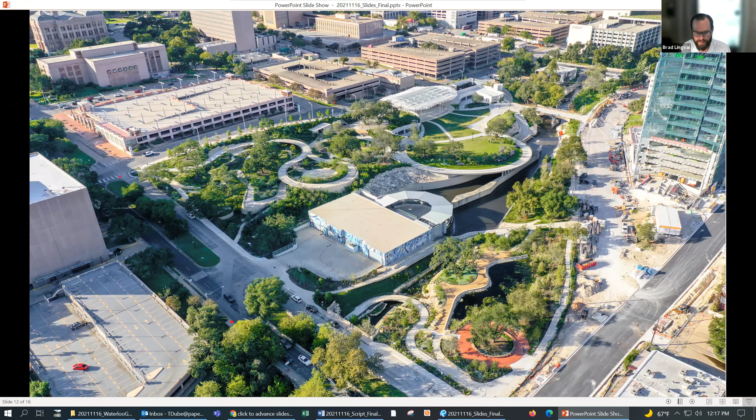The site itself was developed through 3 different site development permits, including the tunnel, which was not directly impacted by the site design of the park. The park was designed around the resultant tunnel construction, but there was a lot of coordination between the tunnel engineering team and the park designers. And then there were 2 site development permits that were directly affected by the park. One being the structural site development permit for the lawn support that extends out over the creek.

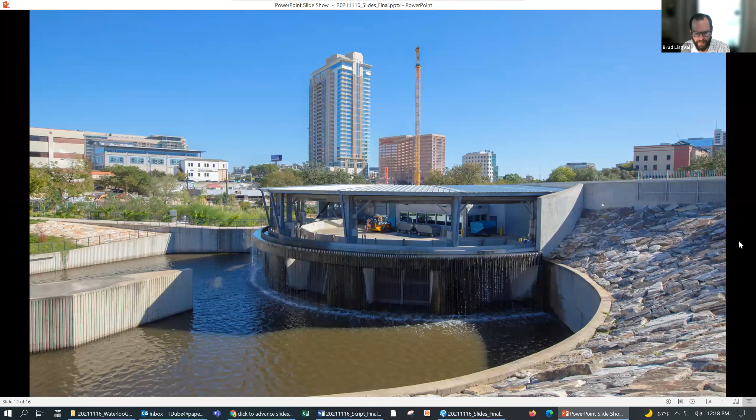Next slide. And then the second being the actual park site development permit, where the music venue, walkways, playground, trails, water quality facilities were all designed and permitted. The tunnel intake facility that we're looking at here is the primary inlet facility for the tunnel. It's actually one of 3 that are located along Waller Creek. But this is the first one, and that facility frees up about 20 acres of downtown property.

As I mentioned, the lawn, if you go to the next slide, Tyler, extends over the creek and provides additional area, not just for the park, but also for the venue and the seating for anyone who's going to see a show at Waterloo Park.

What we see in this slide is actually one of my favorite parts of the park, an ADA route that is not a ramp. It's an under 5% slope walkway that extends from 12th and Trinity, which is the highest point of the site, all the way down to the 14th Street Bridge that crosses Waller Creek and allows accessible access all through the site.

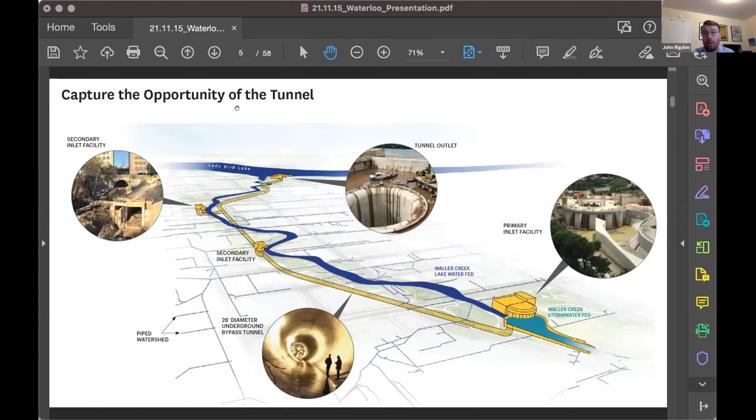So the city of Austin, when they planned this flood control tunnel, reached out to our founders and asked, how can we make these public spaces around the creek better? And that was the nexus for forming the 501c3 that is Waterloo Greenway Conservancy, and also a design competition, which led to the selection of this great team, as Brad mentioned, led by Michael Van Valkenburgh Associates on the landscape side, and Thomas Phifer and Partners on the architecture side, and a tremendous local team, including WGI, DWG, Michael Hsu Office of Architecture, AEC, and numerous other local contributors to this project. Dozens of local firms worked on this.

So that design competition led to the vision of the 35 acres. And as I mentioned, it's broken down into phases. So you can see roughly where the phases are here, just to better fit the screen ratio, but also keep everybody on their toes.

North is now to the right instead of at the top of the screen. So you can see that phase 1 is Waterloo Park, and that's really what I'm going to focus on today. And then phase 2 is in gold there to the south.

And so our next phase is, we call it the confluence. And that section of work from 4th Street to the lake is anticipated to break ground in the spring. So expect more construction, and in 3 years, expect another beautiful park connecting the lake up to the Lance Armstrong Bikeway, Convention Center, downtown Metro Rail Station, and downtown in general.

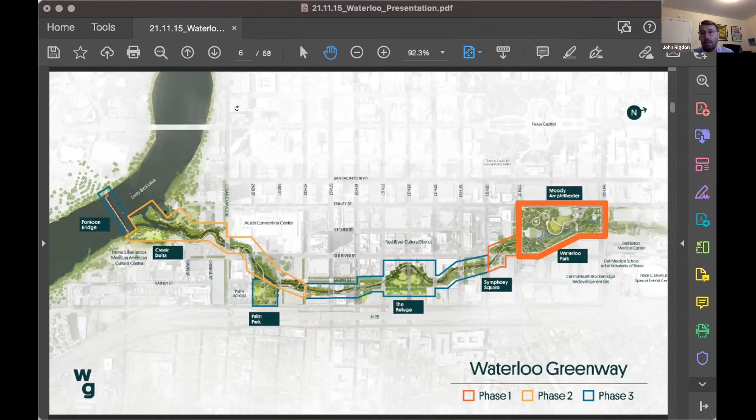So that's phase 2. And then we're going to meet in the middle. So this is a long-term project taking approximately 8 to 10 years more from now to really finish. And a lot of that will depend on fundraising and timing and constructability. So focusing on phase 1, which is Waterloo Park.

So, this is the vision from early on. We have this 10.5-acre park in the northern area of downtown, but an area that is increasingly urbanizing and becoming more of a neighborhood, more of a space where people work and live.

And we wanted to kind of pick up on the history of the park as a special event space and a community gathering space, but also restore a lot of the natural elements of the park and create a tremendous amenity for walking and enjoying the park accessibly. So this image shows kind of the glowing amphitheater in the park early on.

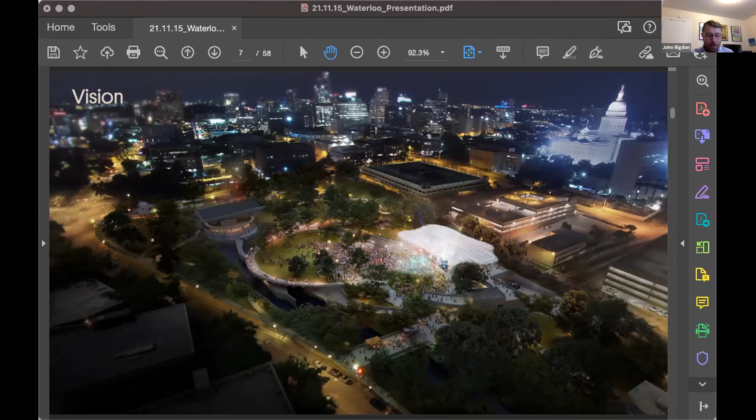Here's where we were about a year into construction. This is a lot of the civil work getting done. So a lot of the stuff underground, many surprises along the way as well when you're working in such an old area of the city and something that has been impacted by years and years of construction from the flood control tunnel. So we're just kind of starting to come up out of the ground here.

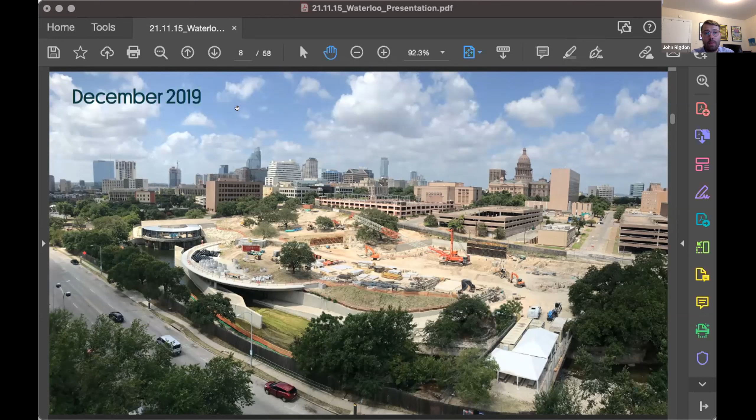And you can also see kind of on the left middle of your screen there, that structured lawn out over the creek, which Brad mentioned in his presentation. Then moving forward to completion of construction, here's where we were. So you can see the amphitheater complete. We've got that grass growing in, and we have the lawn itself complete, as well as the rest of the landscape.

So I'm going to kind of walk through different areas of the park, starting with a plan view and kind of hitting different key spots. And I hope you see these in person and have a little bit of background information from my presentation when you experience these parts of the park.

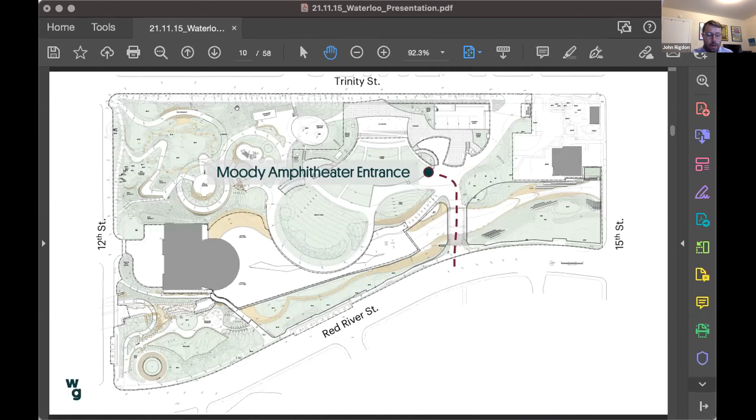So starting as you walk into the amphitheater, really you're greeted by this tremendous canopy structure and concrete walls. This architecture was designed by Thomas Phifer and Partners from New York. And the intent was for this space to be highly flexible between world-class concerts and general park use like you see here. So we have yoga classes, dance classes, all those types of things, including use of the stage.

But then when we have shows, we're able to quickly flip this area, close it off, and utilize it for ticketed private concerts. I'll just point out on both sides of the stage, we have these sort of unassuming concrete walls with steel doors here. And what these contain is all of the support to put on a concert.

We're familiar with special events and particularly music here in Austin and parks. And often that's accompanied by a great experience, followed by weeks of load in before and then weeks of load out afterwards, as well as the time it takes to rest and restore the landscapes impacted by hundreds of temporary toilets, dozens of temporary food trucks, temporary stages, and everything else, including temporary fencing and security.

So this facility was really intentionally designed to have all of that built into the hillside, built into the landscape, and able to be opened and closed when needed. So here you're looking at 12 concession windows, which serve food and alcohol during events. We can open them all, we can open some of them.

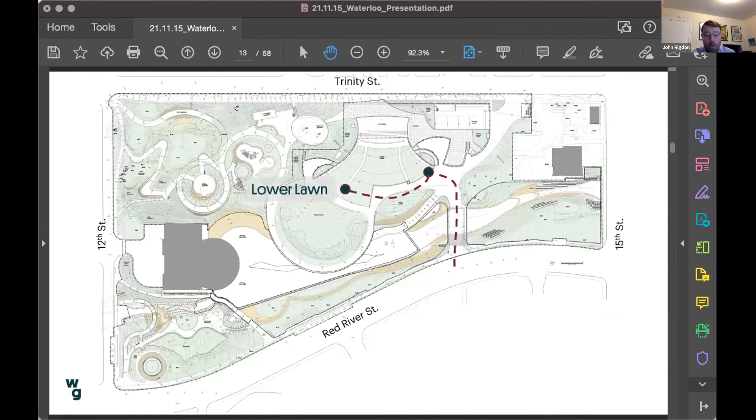Also, we have 80 toilets, which are built into these structures with occupiable and green roofs to support those events as well. So no temporary toilets or any type of infrastructure is needed to be brought in. So jumping forward, that brings us to kind of the lower lawn, which is sort of the central space of the park. Here it is during a show, before everyone shows up.

One thing I'll point out is that we have this really robust lawn, and it requires a lot of watering, and it takes up a tremendous amount of surface area in the park, but that's really necessary to balance these public uses with show uses.

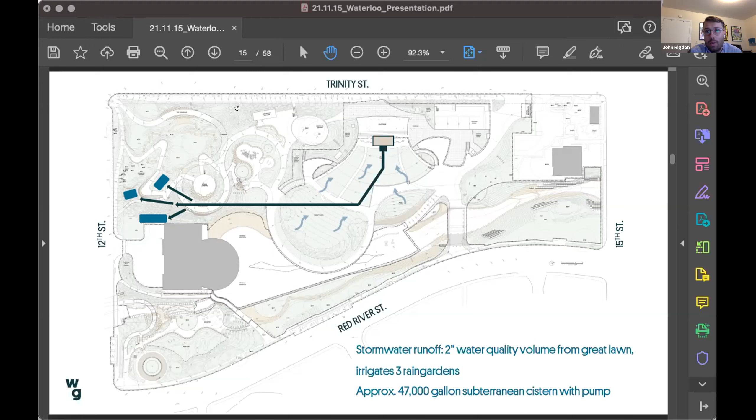One of the key innovations in the project to manage the stormwater runoff in that area was the creation of a large 47,000 gallon cistern underneath the front of the stage that takes that water volume and then treats it through a treatment train of rain gardens. And very few people will ever see this unless I point it out to you. So I'm excited for you to go on site and see these areas I'm talking about.

And I'll have to admit, I would call myself a rain garden skeptic or maybe hater even. Rain gardens traditionally, in my view around here, are often monoculture plantings. They're mowed a couple times a year and they don't look particularly nice. So when the design team came to us and said, we're putting 3 of these in prime areas in the landscape, I was highly skeptical. But they did a beautiful job of turning these into garden spaces that are also very functional.

If you go to Creek Show, which is happening right now, and I've got a plug at the end to share more information about that, you will see one of the light-based art installations is actually in the rain gardens, Rain Garden 2 at the bottom left of the screen there. So an opportunity to see how little it looks like a rain garden and how much it looks like just a part of the overall landscape.

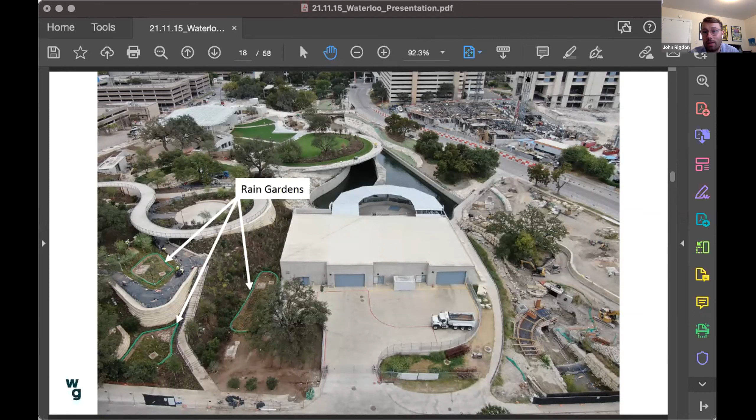Also in this area, I'll point out the canopy itself. So, again, Thomas Phifer and Partners designed this, to create this beautiful trellis over top of the stage. This has 5 miles of steel I-beams integrated into here to construct it. So fortunately, we bought that steel in 2019 and not this year, or maybe we wouldn't have an open park yet. So you can see all of those layers in this in-progress construction photo.

Also, interestingly, you can see a rectangular cutout there where the roof ceiling's a little bit higher. One of the big challenges on site for us was the Capitol View corridor. We have a Capitol View corridor all along Red River Street towards the Capitol. And so this building is just under that. So we have slightly less height than is ideal from the underside of the steel. So this cutout enables us to get about 5 more feet and hang some of that larger equipment during shows without totally changing the architecture of the facility.

So you'll also see an area where it's a little bit less transparent in the middle. That area has a glass skylight system, which blocks the rain and sends it to gutters, which then make their way to that same cistern so that the performers in the center of the stage have rain protection when they're playing. But it also still allows that light to come through and create that beautiful trellis-like atmosphere underneath.

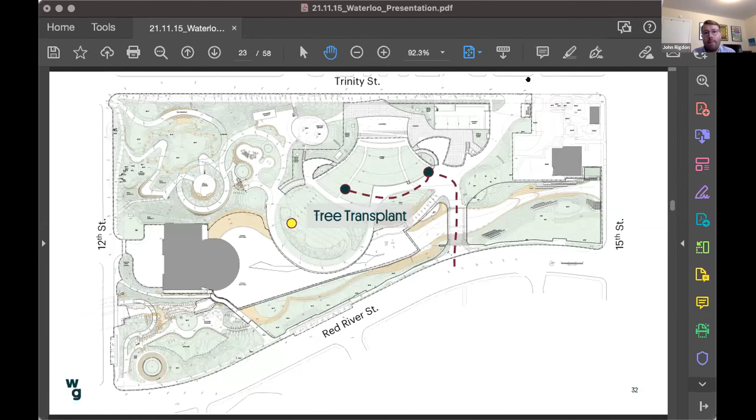Another key aspect, which Brad mentioned as well, are the tree transplants. We planted over 500 new trees in the park. Those new trees are tomorrow's canopy, the next generation's canopy, but day one shade is so critical to the park experience in Central Texas. It's also critical to habitat. So we had the opportunity to save or accept a number of trees, 8 in fact. 4 were internally relocated and 4 were from adjacent sites.

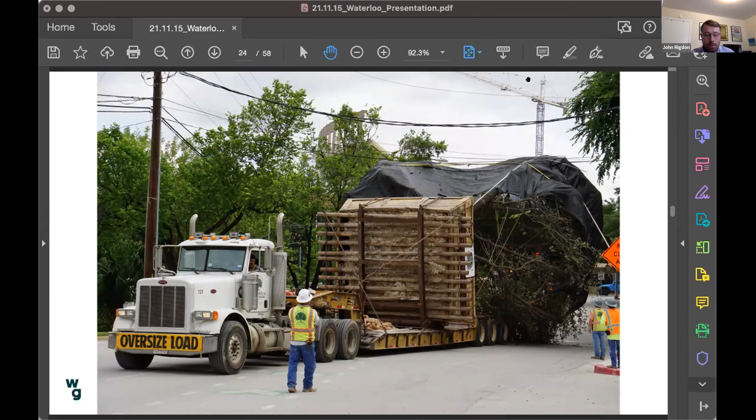So here are some photos of 2 trees being moved from the straightening of Red River and the building of the new Moody Center on UT's campus into the project. So we were ready and willing to accept any good trees to create shade and work with adjacent partners on this. So you can see it being trucked over, craned into its position, and ultimately placed on that very same structured lawn, providing shade for concert goers, folks enjoying picnics, anyone who enjoys that lawn.

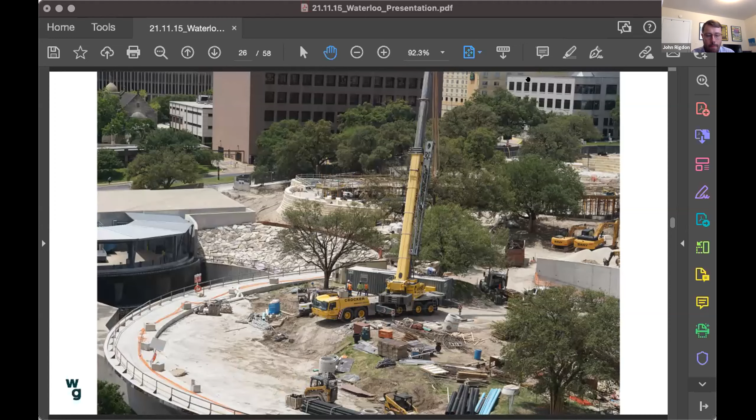Also, this is the biggest tree that we relocated on site. This was a relatively rare partnership between the city, state, and a nonprofit to save a tree. So this was a 41-inch live oak that was rolled over from the northern expansion of the campus of the state capitol. And this tree becomes the shade for the playground ultimately. So you can see it being rolled onto site here.

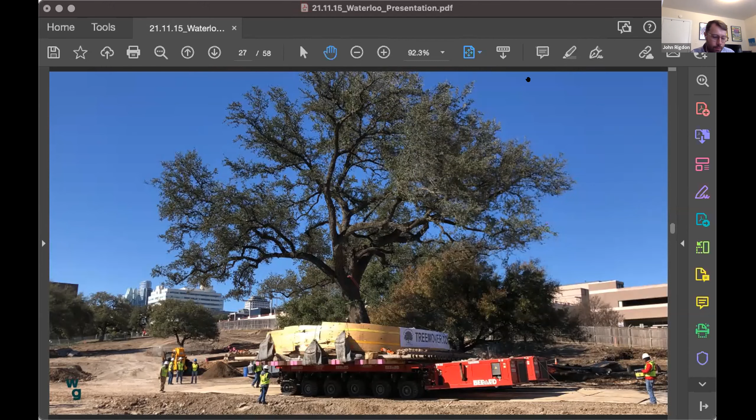And then here's a photo of that first tree in its final location. So you'll go out on site now and you'll see folks sitting under that tree enjoying picnics almost every day. So really, it's costly, but the impact is huge when these are strategically placed. And our design team did a great job of placing them in the most strategic locations to provide great shade now.

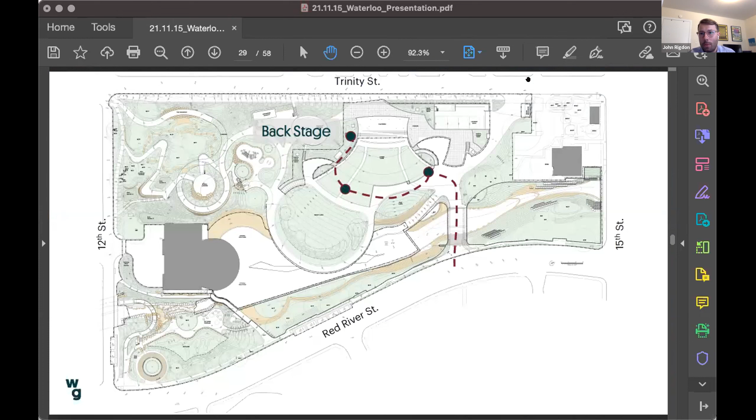Also, we'll just take a peek backstage, which unless you're in a band, you probably won't get to do in person anytime soon. So the backstage here is kind of roughed in. This is all underneath the canopy and underneath the plaza overhead. You can see here columns, which are kind of dropping through the plaza level and into the space below. And this sort of mess of unevenly placed columns has to become all of the back of house support space for major touring acts. So 6 dressing rooms, multiple offices, a kitchen, a large open room for all the touring staff, bathrooms, electrical rooms, IT rooms. All of the support is built underground into the hillside here.

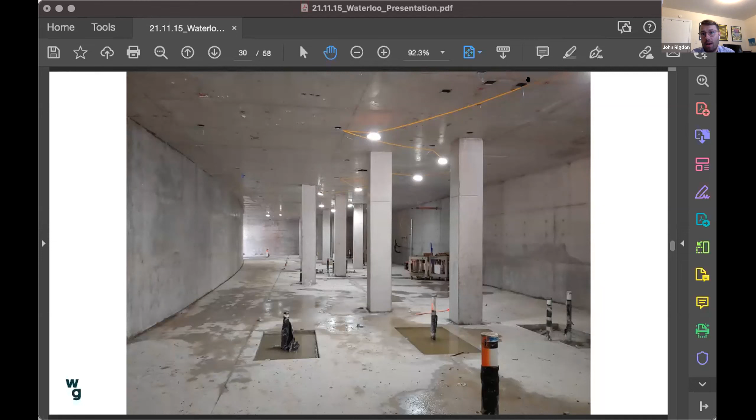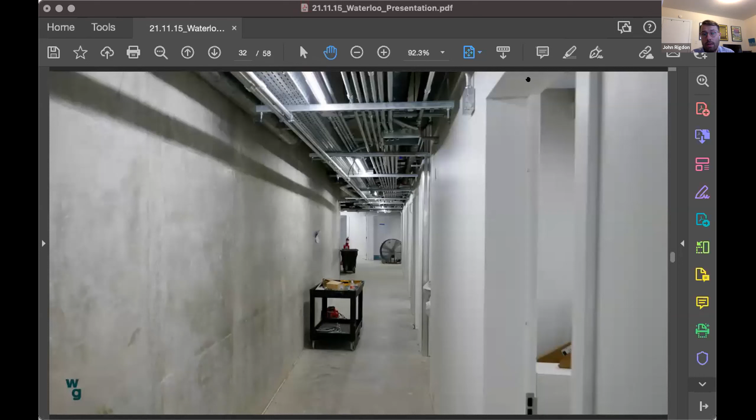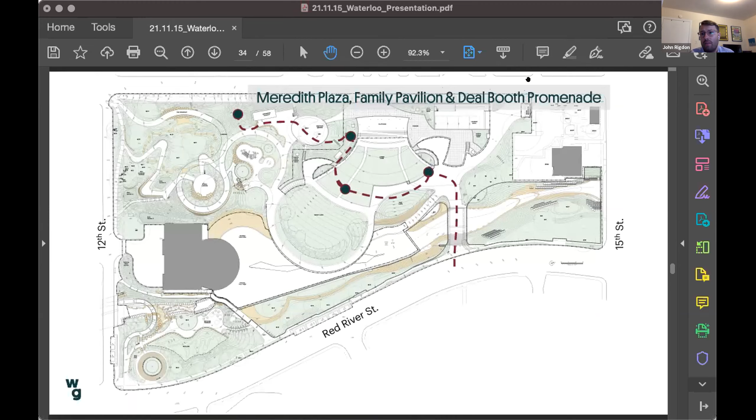Moving forward, we have the Meredith Plaza, the Family Pavilion, and the Suzanne Deal Booth Promenade, which is kind of another large section of the park. I'll talk a little bit about these trees. So, Waterloo Park has beautiful existing trees, and these are the 2 biggest. So I have these 2 great trees kind of along Trinity Street. And we wanted to use this as an area to provide shaded seating, an opportunity to enjoy lunch, enjoy breakfast. We'll have food trucks on site. And this was just the perfect opportunity for that.

So we wanted to build this deck around it. We discovered there was a deck before, and unfortunately it was built very high up, and 6 or 7 feet of the trunk of the tree was buried. So we had to excavate that, lower the level of the deck, and build this new deck.

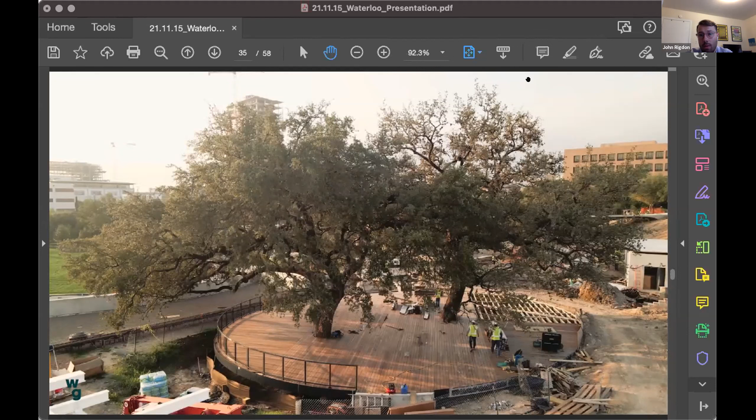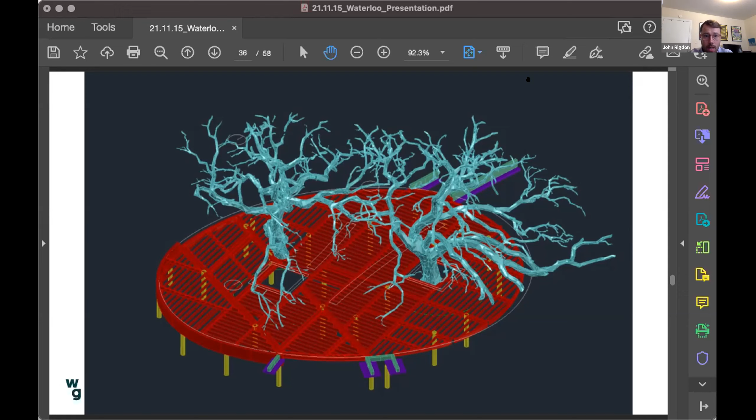We also had to be really careful. The designers had to be really careful about where foundations were placed. So you can see some LiDAR scans of the trees and the critical placements of these foundations, avoiding roots. So lots of air spading around these trees to individually place all of these small piers to support this deck structure. And then you can also see how the unique structural support system came together to connect all of those foundation locations. So kind of a view of what's underneath the very evenly placed boards.

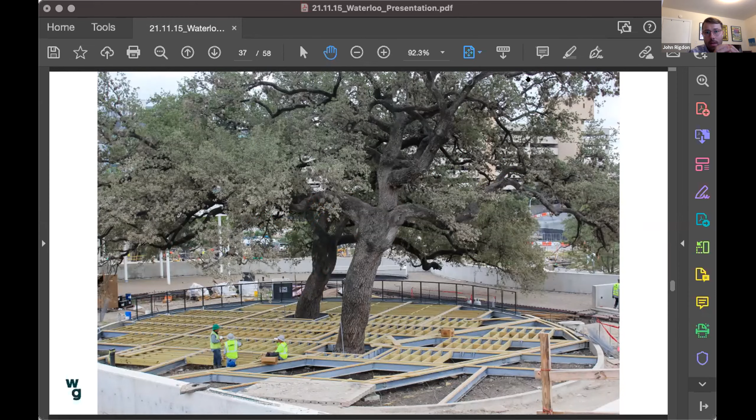You can see kind of the challenge that this presented in order to build the deck and safely keep those trees healthy. Then, it wouldn't be without surprises in Waterloo Park. So towards the end of the project, one of those great trees had a significant branch fall. And we had experts come out and take a look at the tree and determined that it needed additional support to be safely maintained in this location.

The restroom itself is a beautiful concrete structure nestled in the hillside, and you'll see a lot of really excellent concrete work and concrete structures throughout. And one of the really cool things about this is based on a lot of engagement with other parks, we let the designers know that these parks are seeing huge lines for hand washing. And this was even pre-pandemic, particularly for kids.

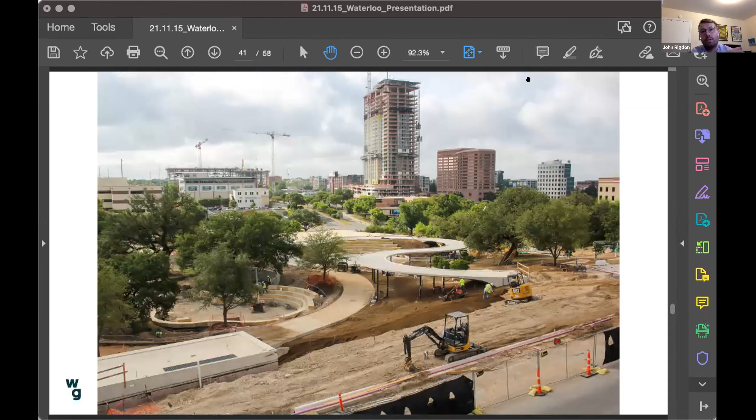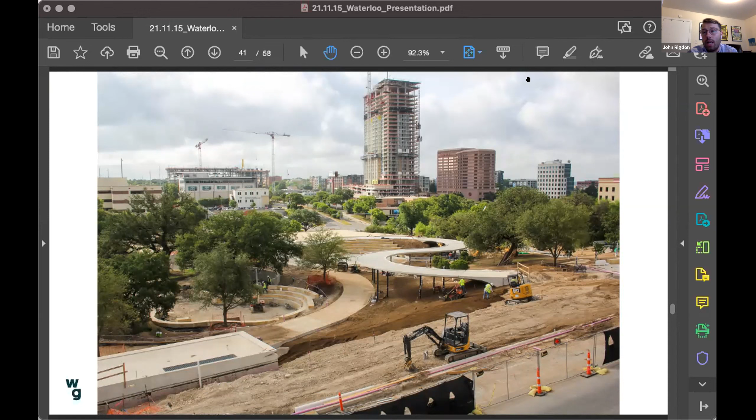Here we have the Skywalk, and Brad pointed this out as well. I like this in-progress photo before handrails and plants are in, because you can really see how the designers put together this thin ribbon of concrete, which navigates a 50-foot grade change from Trinity Street all the way down to closer to the creek. It snakes through there, making that grade change universally accessible without ramps. It's just a sloped walking surface. And it creates these beautiful views out over the park and landscape.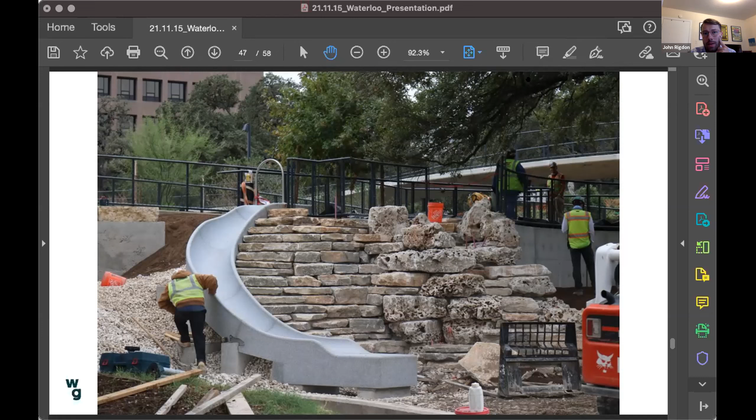Really the idea behind this was metal and plastic slides can really burn your butt and legs here in Texas. It's just too hot. So we had a custom slide milled in Germany that was designed to be built into this hillside around these karst limestone features and really feel like it's always been a part of the park. Here it is going in, and then here it is being used shortly after our opening.

So that's become one of the most popular features of the park. Definitely recommend going down it, all ages, when you go visit the park. And you can see here the playground as it nestles next to the food trucks and that family pavilion area. So really trying to create a space that families can spend a whole day, a whole evening enjoying in the park.

And then finally, we'll jump over to the Hill Country Garden. And this is one of my favorite spaces. You can see here our landscape crew planting. There are over 90,000 plants that we planted in the park. It's 95% native species and 5% adapted. 200 different native species, some really exotic native species, planted in ways that really create this garden-like atmosphere, in addition to those 500 trees we planted.

You can also see these stone pathways that are for exploration of the landscape. So ways to extend the play for kids, but also for adults to really enjoy and experience the plants up close. And here is an image of what it looks like from a few weeks ago. The monarchs have just been going crazy, tons of pollinators here.

And then, practically every 3 weeks, a different color is really popping in the park. So here you see a lot of blues and purples. We had reds and oranges before. All throughout the year, different things are blooming in different areas, creating real drama in this space, but really focusing in on those native species and the existing beautiful heritage trees.

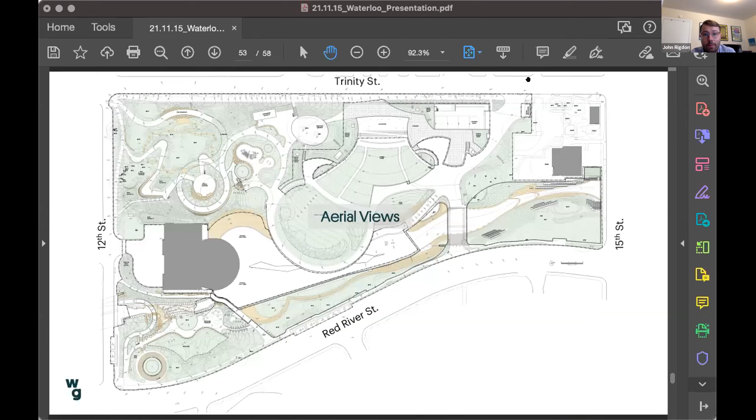That northern third of the park, we put up very minimal temporary fencing for ticketing and closure. Then the rest of the park remains open for general park use, even when a concert's going on. So a really flexible space oriented around programs and activations, but always having those quiet areas for just enjoyment of nature.

And with that, as I mentioned earlier, I'll plug Creek Show, which is ongoing now in Waterloo Park this year. This is our 7th Creek Show. So folks may have been in the past to Creek Shows along Waller Creek that we put on, but really this is a focus on local designers, architects, artists, creating light-based art installations along Waller Creek or in Waterloo Park, and really highlighting different elements of the story of Waller Creek and Waterloo.